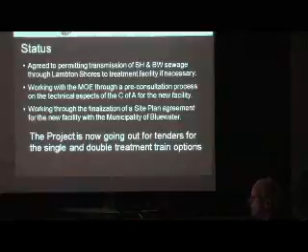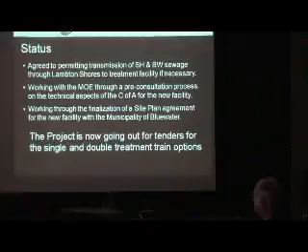We've agreed to allow, we understand that lagoons are in South Huron, but to get there, they have to come through the Grand Bend area. We've agreed with our partners that we'll cooperate with them in finding a route. There was some initial discussion about sharing or joint development of infrastructure, but our preference is that we each retain our own independent infrastructure from one another.

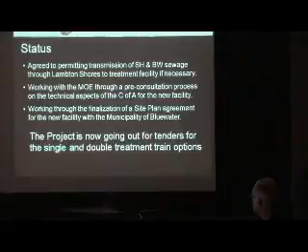We're currently working with the MOE on the design criteria and technical aspects, finalizing the site plan agreement with Bluewater. And it's out for tenders.

We asked the county septic building department to give us any data they had on the age of existing septic systems. What we identified early on was that the county, although it's the approval authority for septic systems, either had a lack of records or a limited number of records and did not do re-inspection, so we really didn't have good current data on the performance and inspection of existing septic systems. So we asked them to give us the data that they did have.

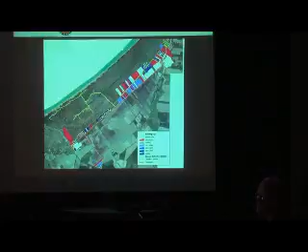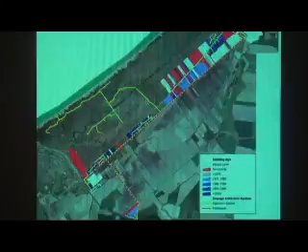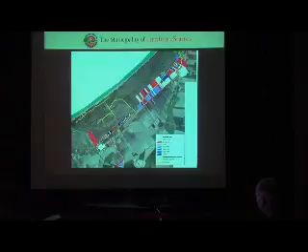We tried to represent it on a lot grid for the 21 corridor, but the primary focus for undertaking the EA was to service the Pinery Provincial Parks. That was the immediate need. They wanted to proceed, so we undertook this to make sure that whatever we designed to service the Pinery would be capable of meeting the needs of the balance of Zone 4 if and when it ever developed or was ever brought on. That was the importance of proceeding with that EA for Zone 4, making sure the design for the Pinery didn't limit us in terms of meeting the balance of needs.

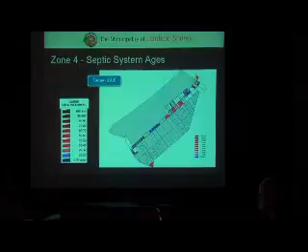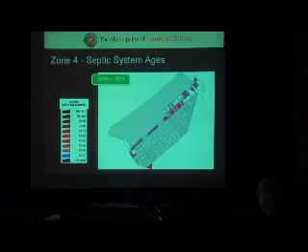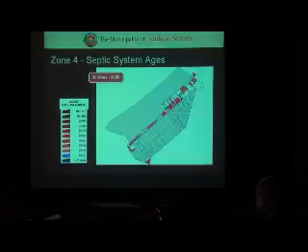So just as a tool to try and give us a better handle on the age of the septic systems, because there was lots of speculation, we tried to track this over a period of septic system ages, 10, 20 years, and look at it 10 years down the road. The red illustrates that as the systems age, we were going to increasingly have a challenging time meeting effluent quality.

As I said, the primary effort was to service the Pinery Provincial Park and South Bend Estates, which was quite anxious to move at that point in time, but was subsequently put on hold for a variety of reasons.

We also understood that it's going to be very expensive to develop the collection systems for Zones 3 and 4, and when the approval and funding was given for us to expand the plant facility, we were told by the powers that be at the province and federal government, come back to us when you've got your plant underway, and we'll talk to you about helping finance your collection system, because they recognize the cost of that. So that was really put on hold so we could pursue that.

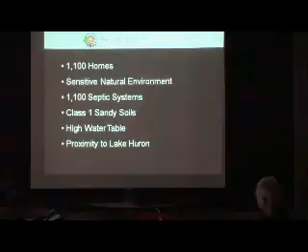In looking at Zone 3, we recognized there were a lot of homes, natural environment there. The Class 1 soils, the high water table, and its proximity to Lake Huron made it a really challenging area to address if and when we were going to address it.

There were also discussions at that point in time about the province imposing a mandatory inspection program for all septic systems across the province, which might indicate that tertiary systems might be required in replacing conventional systems that may exist in those areas. That mandatory inspection systems legislation only applies to the Lake Simcoe Basin at this point in time, so we're trying to anticipate what that impact would be if it was applied here.

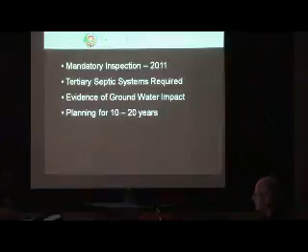We undertook the groundwater studies, which Dr. Balke reviewed with you tonight. Again, the target was to plan for 10, 20, 30 years down the road.

Public concerns, obviously, public information sessions and public meetings were held with respect to it. Concerns expressed were loud and clear about the cost, the timeframes, the reliability of various collection systems, the impact on the environment of those systems, and primarily the necessity. There was a sense that there wasn't a proven need, that existing systems were performing and were not problematic.

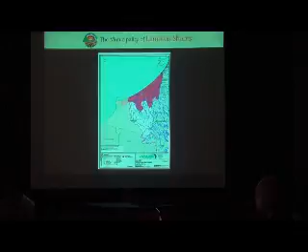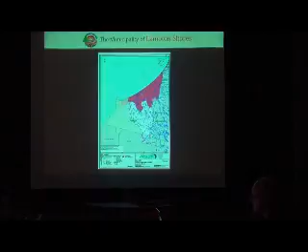This is a map of the source water from the Source Water Protection Group, which identifies almost the same corridor that we're looking at for Zones 3 and 4. It's an area of concern that source water protection identified. The little circle you see up at the top of the map, right out in the lake, is the intake source for the London area water system and its kind of protection zone.

So it just shows you the proximity of where water intakes are. There's a similar intake just south, just east of the point at Kettle Point as well, which feeds the Kettle Point First Nation.

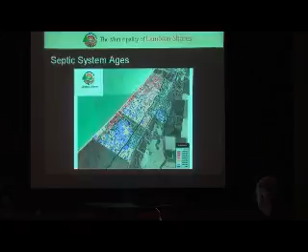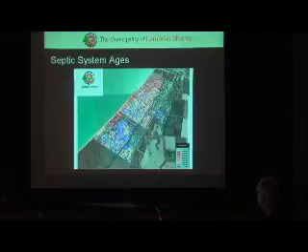We did the same mapping of the existing developments in Zone 3 and 4 in terms of what data the county could provide about the age of those septic systems. Again, it was an indicator of age and not performance, but it gives you a parallel about what type of systems we were dealing with.

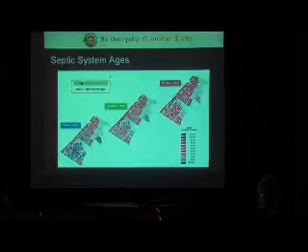We tracked those and projected out what the impact would be 20 years as those systems age, to try and define whether there's an urgency to doing something or how we would go about tackling that target.

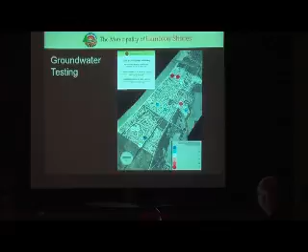As indicated, we did the groundwater testing and did some summaries of what the data was telling us. Dr. Balke's reviewed that with you this evening.

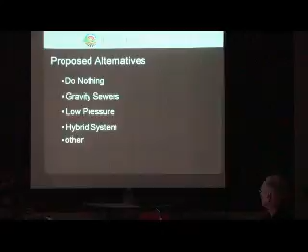Initially we looked at a number of alternatives for bringing servicing to zones 3 and 4, which was do nothing, because maybe there aren't indicators that substantiate the need for a collection system in those zones. There was, maybe it could be done by gravity sewers, a low pressure system, a hybrid system which is a combination of both, or some other system that we hadn't looked at.

So we were looking at this issue that seemed to be coming, the headlight of an oncoming train, about mandatory inspection.

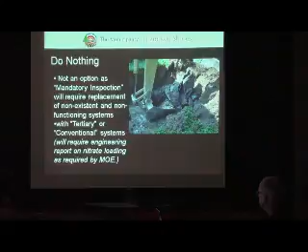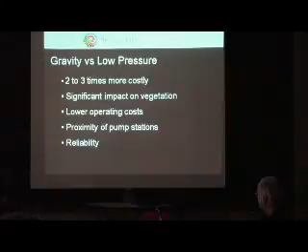We looked at, in a very preliminary way, the pros and cons of gravity versus low pressure systems, and in a very general way the costs, the impact on vegetation, the operating costs of the systems, and the proximity of pump stations, and so on and so forth.

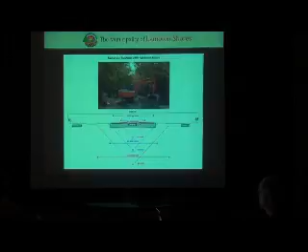This is just an illustration of the corridor that would be required if it was a conventional gravity sewer system, and the potential tree loss that might occur in this zone. Again, I stress that it would be 'might.' This was an illustration that Nick Verhoeven did for me about trying to quantify that.

The large circle, it's reddish or pinkish color from where you're viewing, represents out of the total area that's marked what the tree loss would be. It doesn't mean the trees can't be replanted or that you'd try to avoid them. The potential was that there would be that much tree loss.

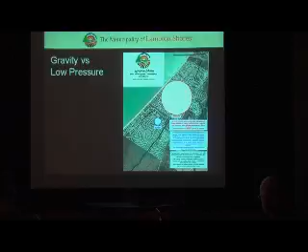The blue dot represents a smaller portion. That would be the tree loss represented by the installation of a low pressure system, which is bored in or tunneled in. You can work around the trees. It has less impact on the natural environment.

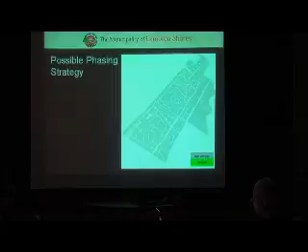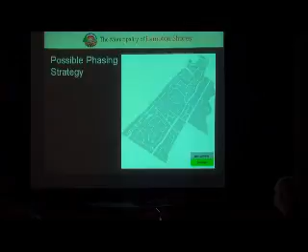We also looked about talking to council about this. A big undertaking - it's going to take servicing 1,100 homes. To do it instantaneously without funding is something that they really had to think about. So the preliminary discussions were about how we would go about doing it.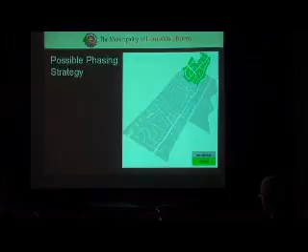Certainly a possible phasing strategy, and this is very schematic - please don't draw any conclusions. I think we just threw it out as how it possibly could be done. Timeframes are totally undefined here because it could be 10 years, 20 years, 30 years as this system builds up.

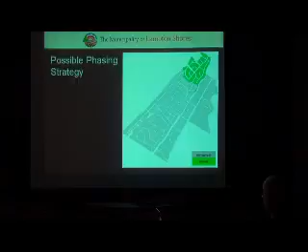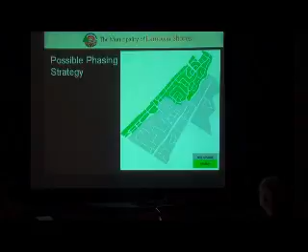I think what Nick tried to do is track the age factors of the oldest systems and build out the system in a way that could function at gravity flows or low pressure flows, to gradually expand the system to cover all the areas of Zone 3 - this is Zone 3 in particular. So again, it was just conceptual.

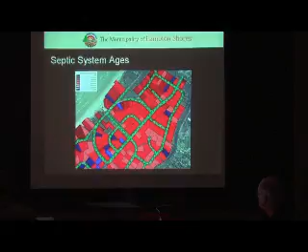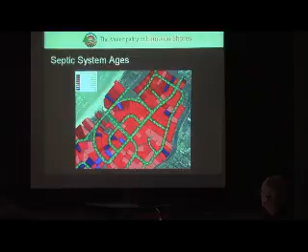Again, some of these ages of systems - some systems are newer, some are performing - but if the infrastructure was there, the collection system would be at low pressure or gravity. People could have the ability, as they do now in the old South section that was serviced by the Village of Grand Bend, to have a main or trunk main outside their property on the road that they could access at such time as their septic systems either needed replacement or were failing. They could access the existing system. So we were looking at, is that a feasible way of doing it?

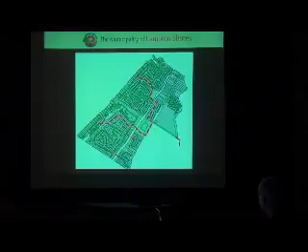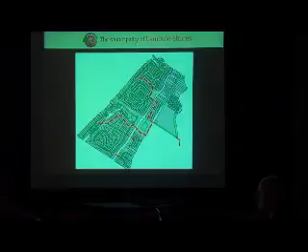There's a lot of discussion about the low pressure pumps, and we tried to illustrate what those look like. I also asked Nick to do a schematic about how a gravity flow system could work. The red represents, I believe, a trunk system and the location of possible pump stations for a gravity system that could service. Green represents gravity lines, or low pressure lines that could feed if it was a hybrid system.

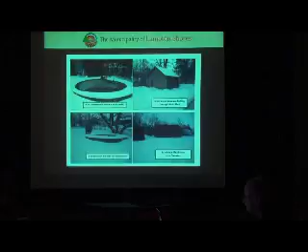We need to put in a pump station. There's substantial facilities in terms of the amount of space they take up and the impact. Given the vegetation in Zone 3, you would do...